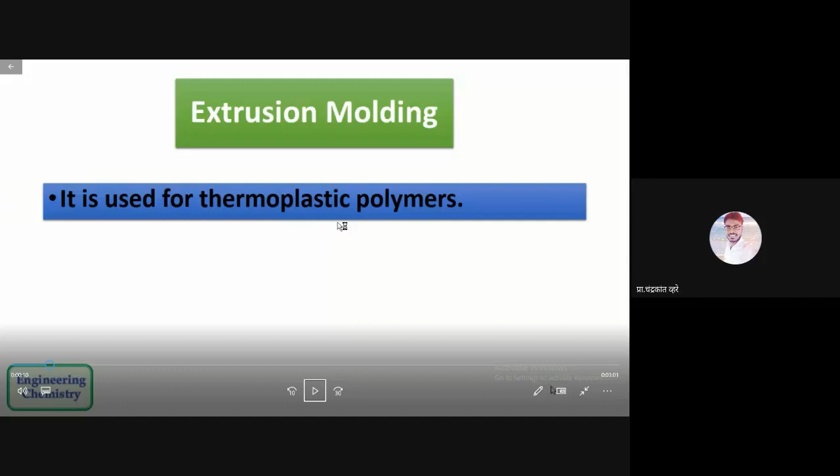So we are using it for thermoplastic polymers. Okay, long articles are manufactured. Long articles means long product.

Okay, so long wire. Most of the time extrusion molding we are using it for the long type of product.

For some time we are using it for insulating purposes, and sometimes we use it for long hollow pipes.

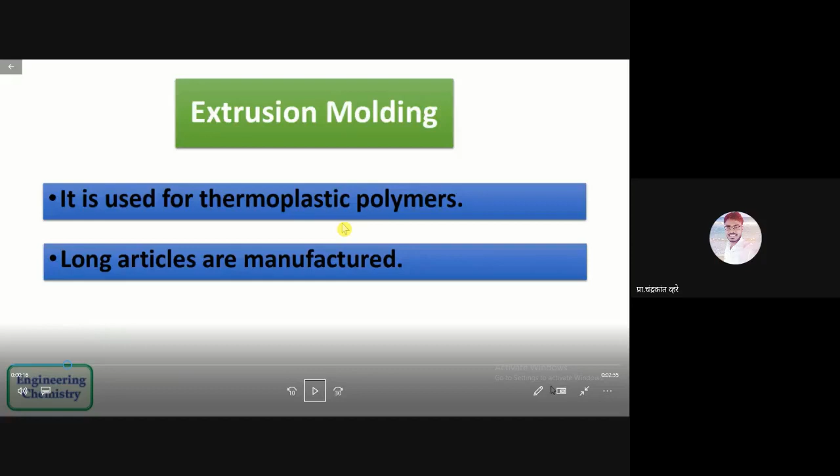Or another hollow product, but they must be in long size. Okay, in short size it is not possible to manufacture.

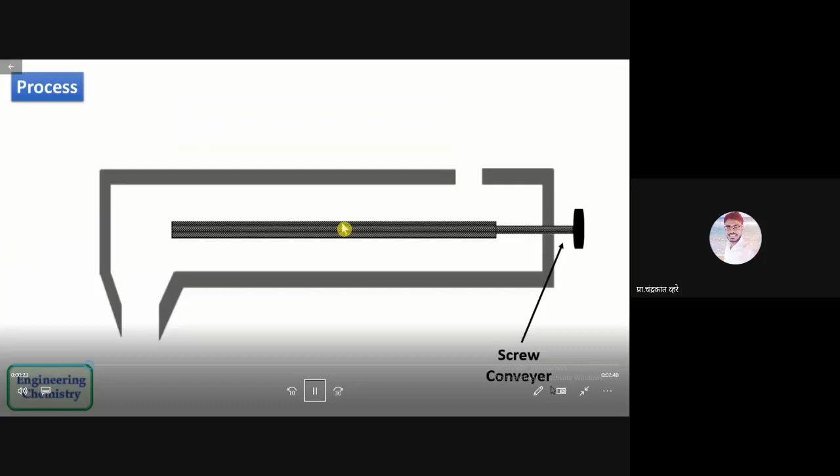Okay, so let's see the process, how it is operating. Okay, so this is hopper.

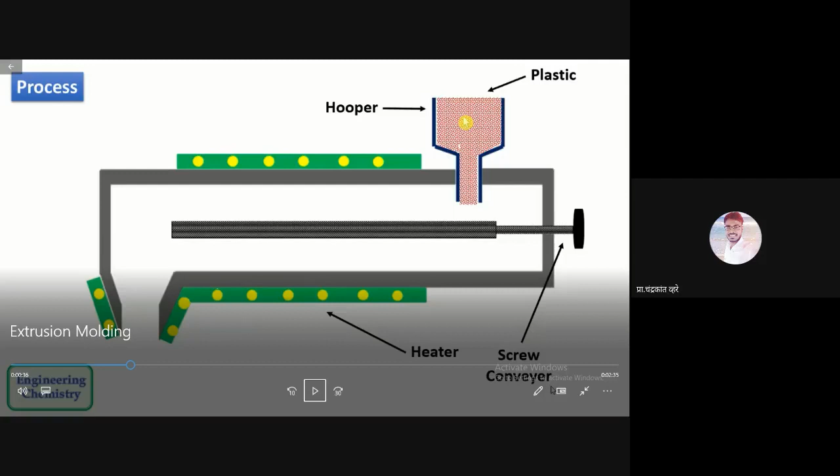At the top, this is hopper, this is screw. This is plastic material in the form of powder, or we can call it raw material in the form of some solid.

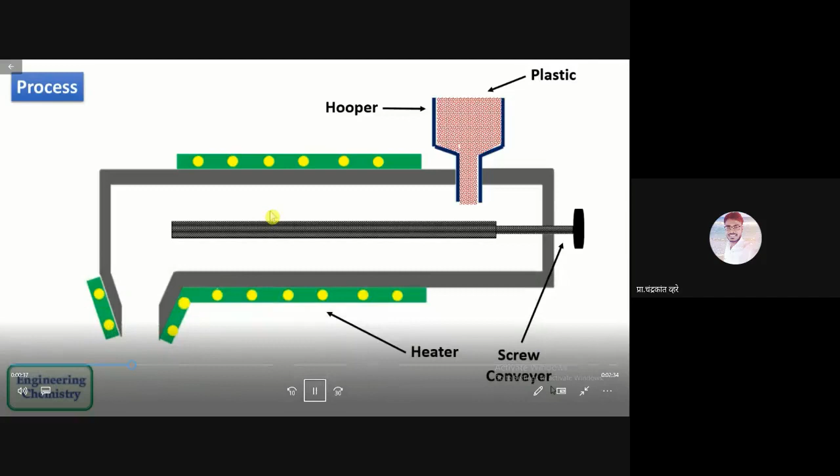Or here we have heater for heating purposes. Okay, so let's see the extrusion molding. Here is screw, and due to this heater it got molten.

Okay, and see the application, major application. Now what industry is doing, they are just inserting the wire from one side through die. Here there will be a die, and on the other side you will get an insulated wire.

Okay, so like this it is operating. Metallic wire, we are just passing through molten plastic material. So that's it, simple.

Here you will get plastic coated cables. Here we are inserting the metallic wire through die into the molten material.

Plastic material, and here we are getting the plastic coated cable. So it is not difficult.

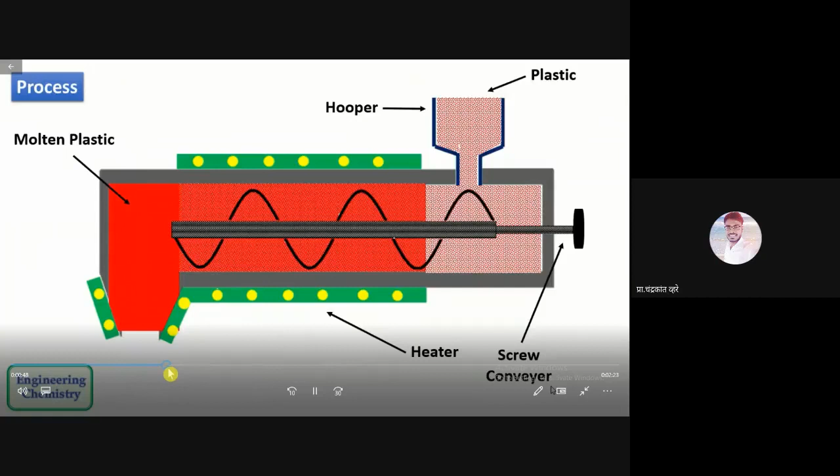Again, you just observe it again. Yeah, just see the video again.

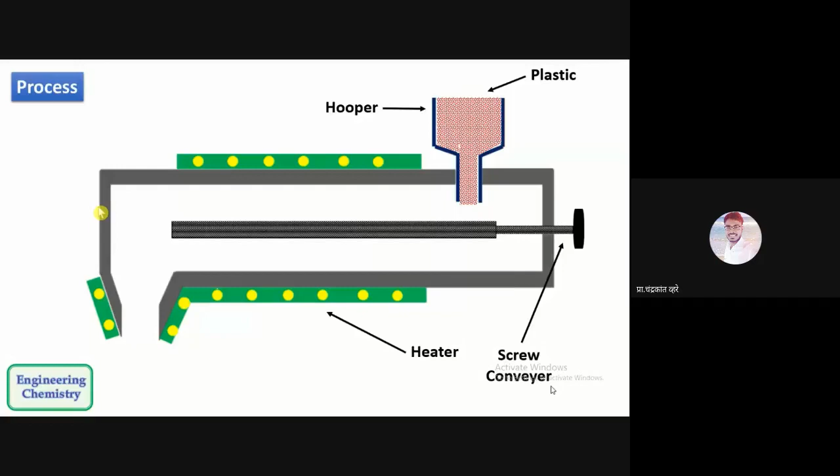Okay, for maximum time we are using the extrusion molding process for insulation purposes.

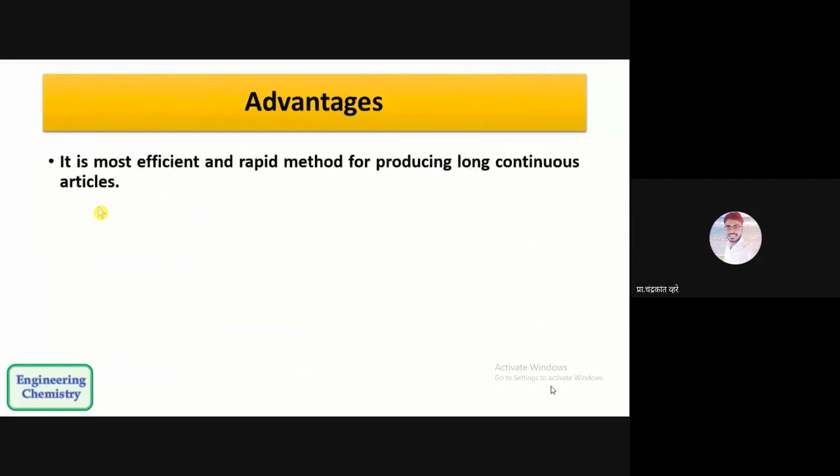Okay, so these are the advantages. It is the most efficient and rapid method for producing long continuous articles. Extrusion molding has a low cost relative to other molding processes.

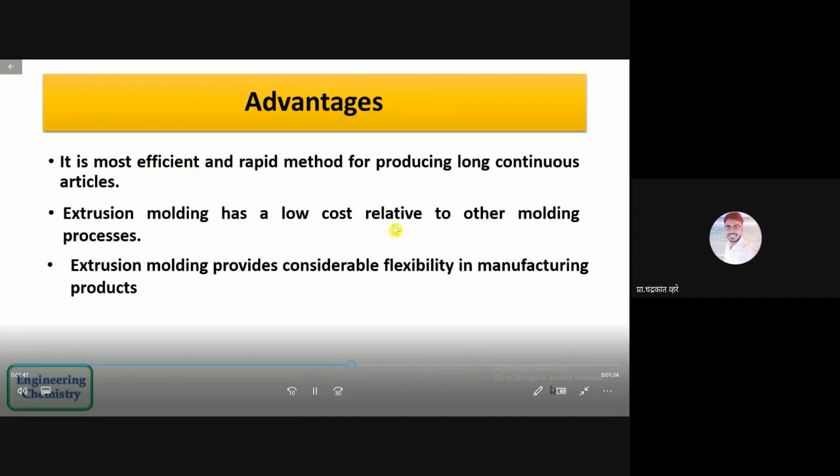Extrusion molding provides considerable flexibility in manufacturing, and the plastic remains hot when it leaves the extruder, which allows for post extrusion manipulation. Okay, so what is the meaning of post extrusion manipulation?

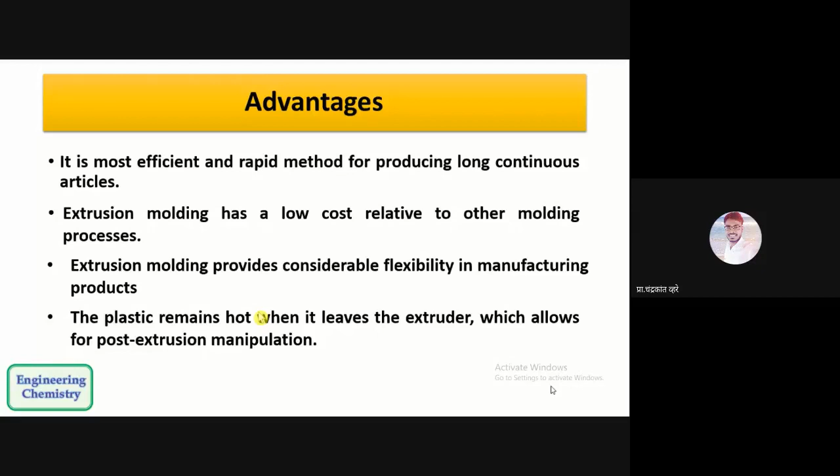We can call it post extrusion manipulation. Okay, so these are the major advantages of extrusion molding.

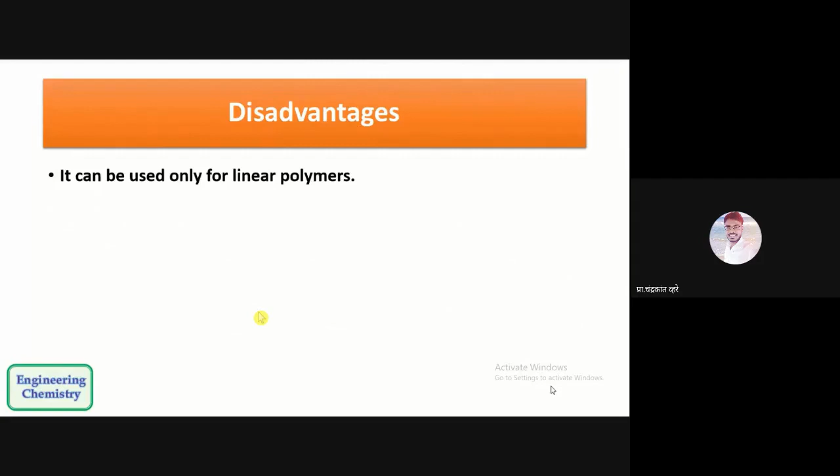Let's see the disadvantages. It can be used only for linear and long polymers; that is its only application. When the hot plastic exits the extruder, it frequently expands. Okay, there is a problem of expansion also.

The nature of the extrusion molding process places limits on the kinds of products that can be manufactured. Only long, linear products can be made using extrusion. Complex or short parts cannot be manufactured this way. In 99% of cases, it is used just for insulation purposes, so the major use is insulation.

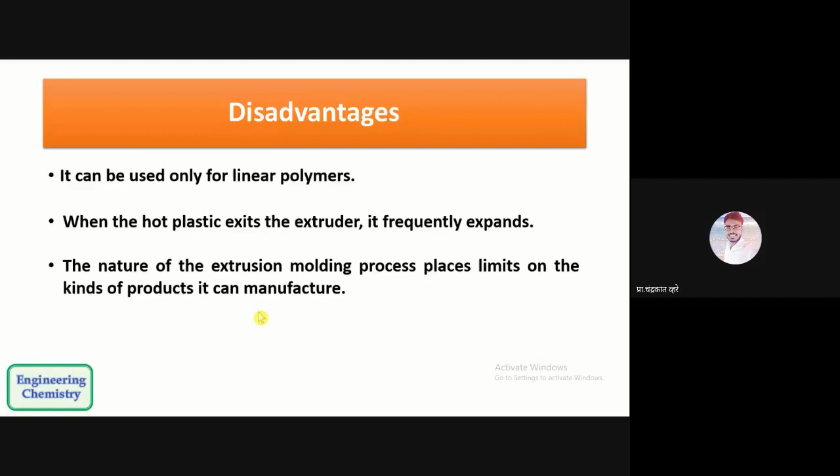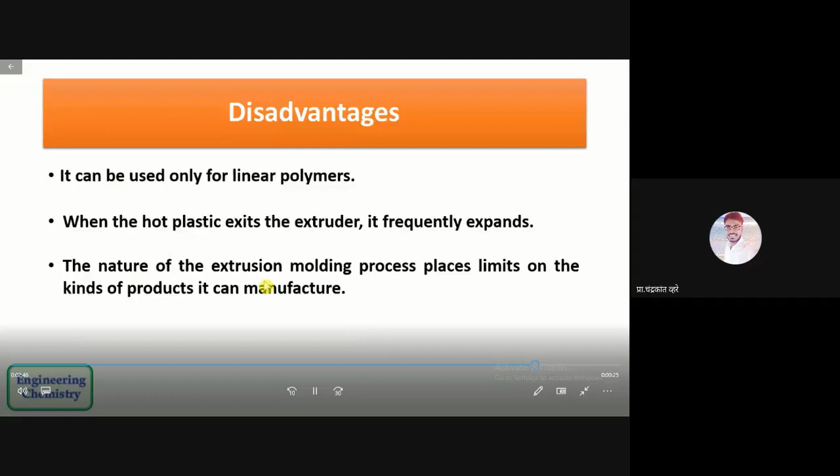So that's it for the disadvantages of extrusion molding. Now, major applications.

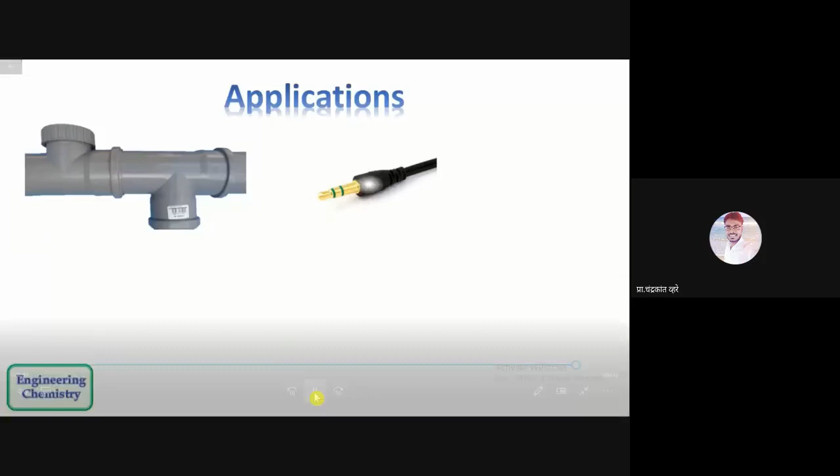Applications include charger pins, wire insulation, toothpaste tubes, and the pipe wires used for drinking cold drinks in summertime. Everyone uses such pipe wires for cold drinks. So these are all surrounding applications that everyone uses - these are the applications of extrusion molding.

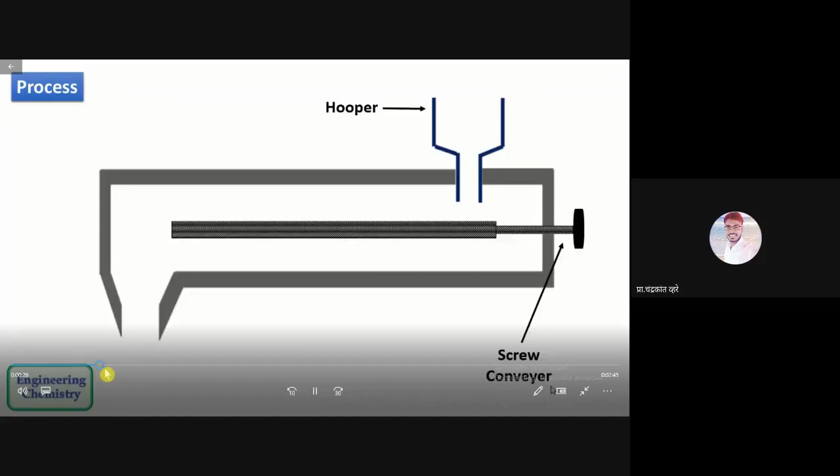Draw this diagram. Take 2-3 minutes and draw it. This is a very proper, very simple diagram - in examination or elsewhere, you can just use this diagram. So mention all these details and take 2-3 minutes to draw it properly.

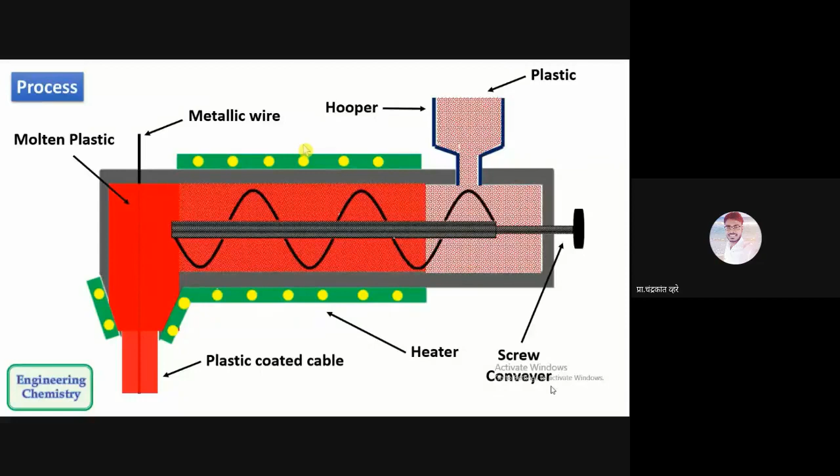Is it completed? Nana Saif, roll number 47, is it completed? Roll number 47, 22. Roll number 5, 6, 8, 10, 11, 16, 17, 20, 21, 30, 31, 34, 35, 37, 41, 43, 44. Is it completed? 46, 58, 63, 78, 79. Is it completed? Yes, sir.

Okay, so go for the theoretical part. Just write it - write the principle. I will zoom it up so it is properly visible now. So write it.

If you are facing problems while writing, just zoom your screen so you will get it properly visible. So write the principle - the heading is already given as extrusion molding diagram. We have drawn two diagrams; prefer the second diagram, and now write the principle. Write it fast.

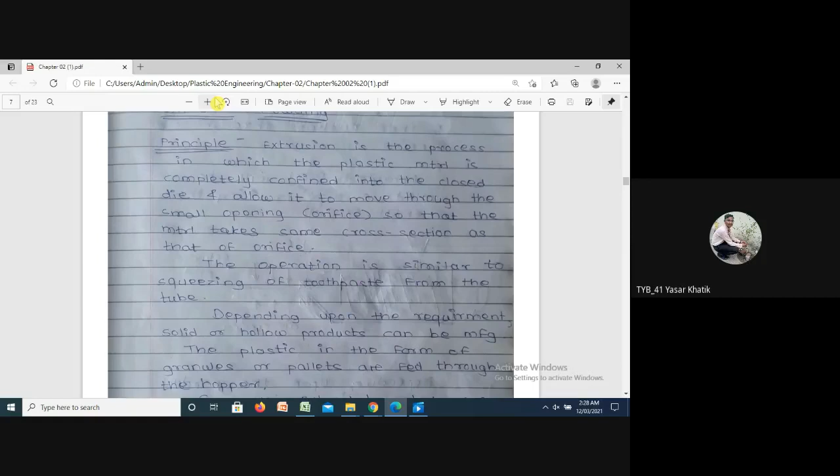Okay, go for the next part - write it below. Generally, extruded products are used as a raw material for other finished products. Write it fast.

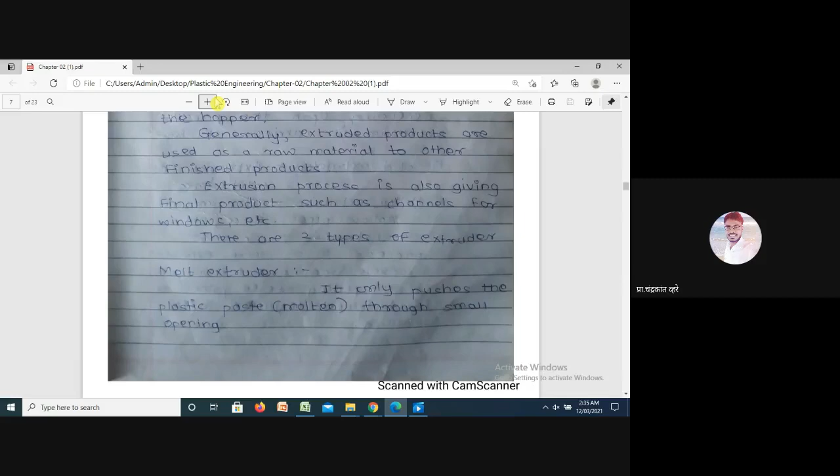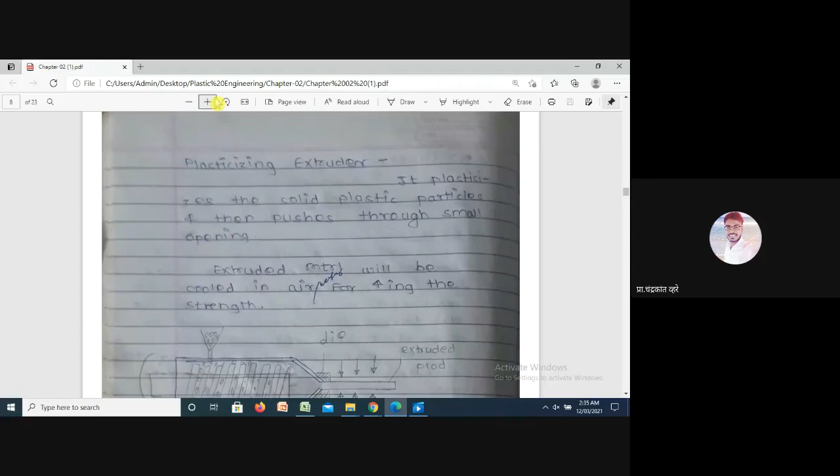Is it completed? Okay, write it fast, right after this we'll go for the next part. This is all about extrusion molding. It is not difficult, so write it properly.

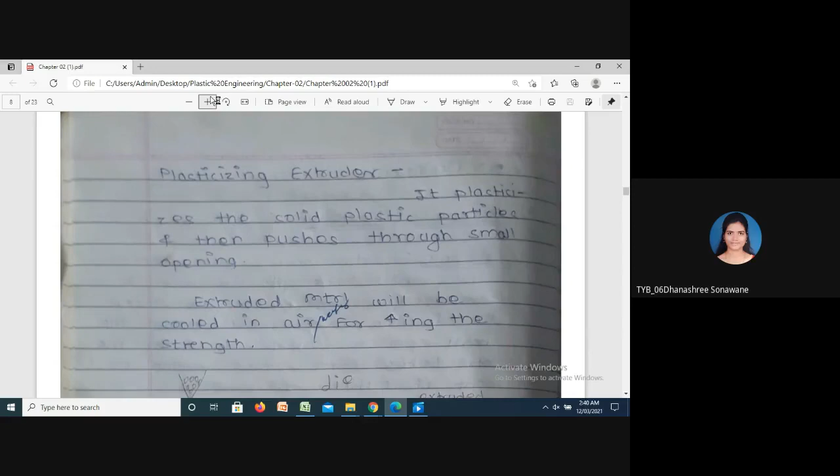Okay, that's it for extrusion. Just write the advantages and disadvantages only - this other part is not required. So write down the advantages and disadvantages.

We'll stop here today. Write it properly - write the advantages and disadvantages of extrusion molding. This is advantages and this is disadvantages.

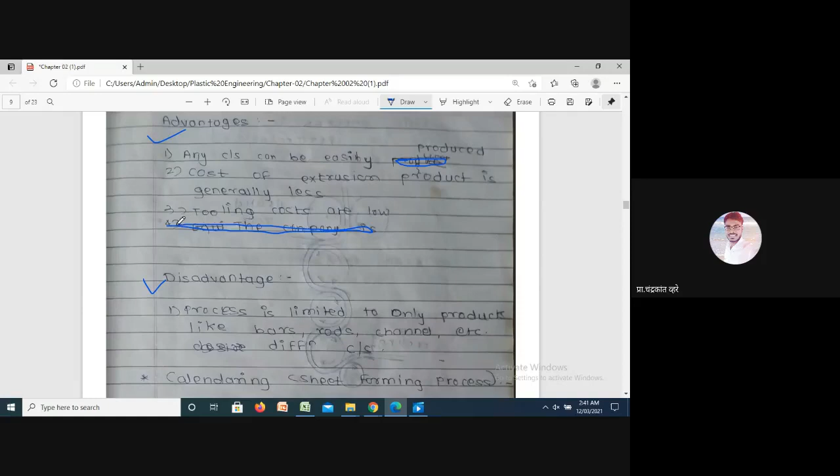Now write it. Products can be easily produced. Second, the cost of extruded products is generally less. Third, tooling costs are low as compared with injection molding. Disadvantages: the process is limited to only products like bars, rods, channels, etc.

This is also not okay, so write it.

In the next lecture, we will start the calendaring sheet forming process - how plastic sheets are manufactured in industry. This process will start in the next lecture; we call it calendaring. Just understand the process practically - theoretically it is not very important, but understand it practically.